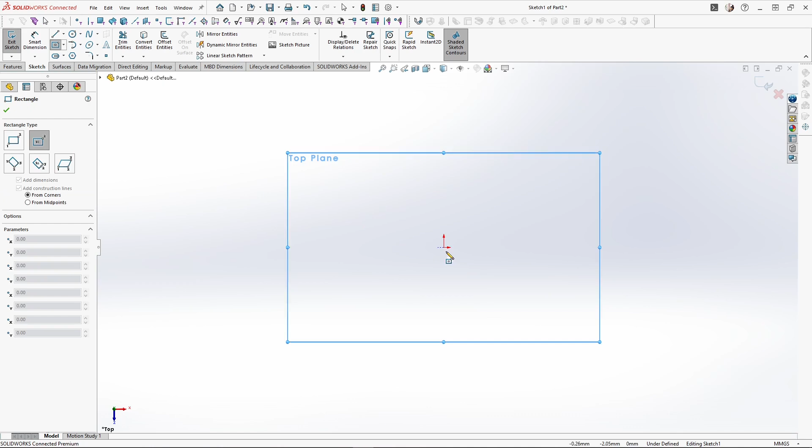Starting a new part with the cube in hand and a trusty set of calipers, I started a sketch onto the top plane, and with a centre rectangle sketched to 24mm square, extruding it into a cube by 24mm. Next, I'm going to model a keyring hoop. This helps with the orientation of the cube and where all my split sketches need to be.

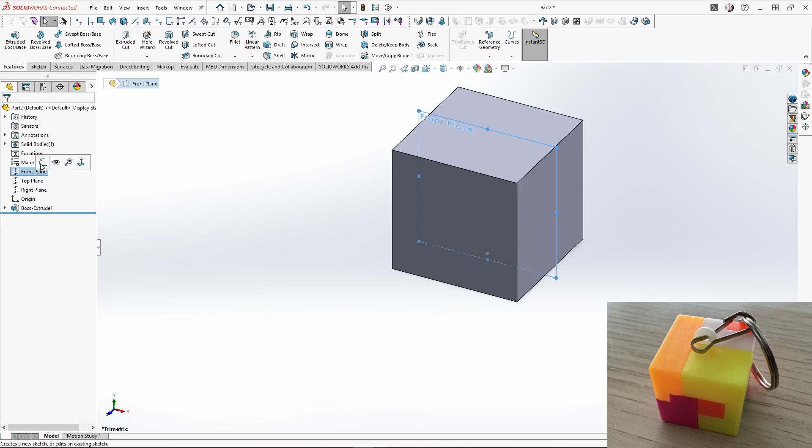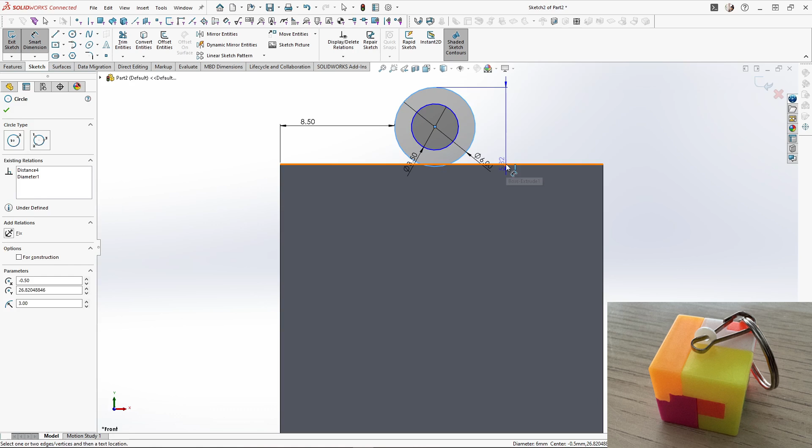Sketching onto the front plane, using the circle, I sketched an inner circle of 3.5mm and an outer circle of 6mm. The keyring hoop isn't actually centre to the cube as I initially thought, it's slightly off centre. Adding smart dimensions, I can hold shift and select the edge of the circle here and this edge of the cube and input 8.5mm. Then a final dimension, again holding shift from the top of the circle and the top edge of the cube, I can input 5mm. Then extruding the sketch 1.5mm in the opposite direction, merging the result.

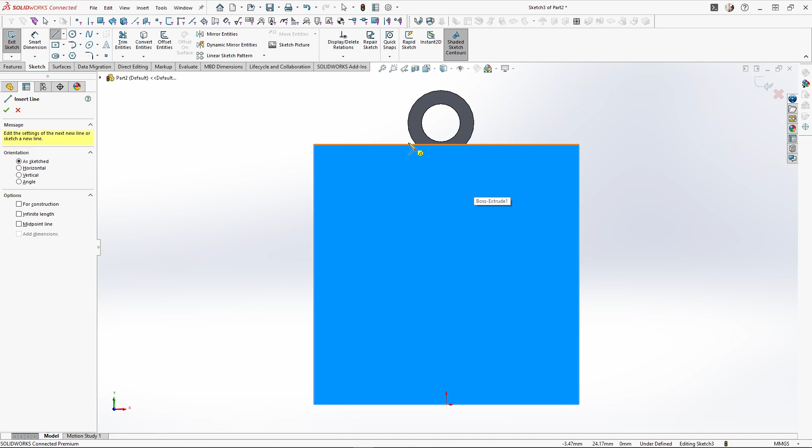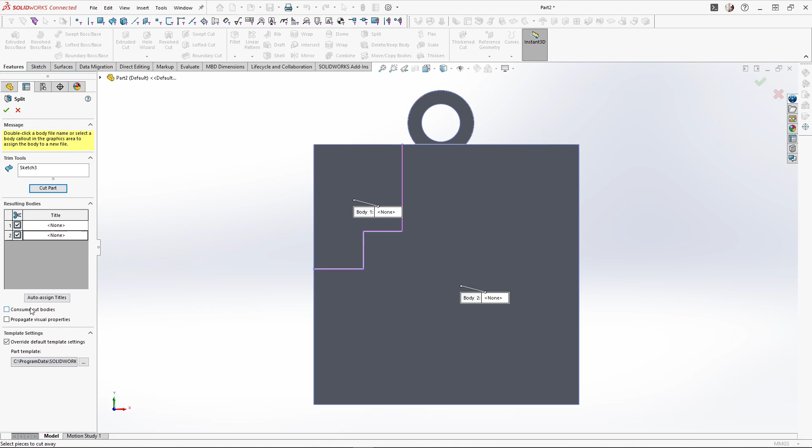For split sketch 1, I'm using the line to sketch onto the front face of the cube here. You have to ensure the sketch goes right up and attaches to the edges for the split to work. Once my sketch is fully defined, I can select features and split. Under Trim Tools, the sketch will be highlighted, and then I can select Cut Part. The features will split the part right through. To keep both resulting bodies, I need to select the scissors icon. Ensure Consume Cut Bodies is unchecked, so that all the resulting bodies remain, and apply it. I will be hiding each sketch after each split feature to keep the model tidy.

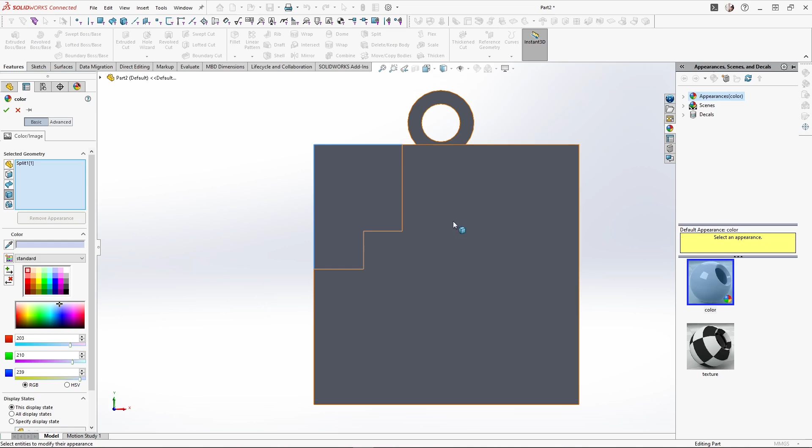Selecting the split body, I'm adding a colour appearance. I will be doing this for most of my split features. This is to help me keep track of the bodies as I go, as it only gets more complicated. For split sketch 2, sketching back onto this face, I'm starting the split sketch here, then sketching like this up to the bottom edge. Then I needed to add smart dimensions. I won't go through every dimension I apply, but if you're following the tutorial, you may want to pause certain stages and ensure you're adding the dimension to the correct sketches and edges.

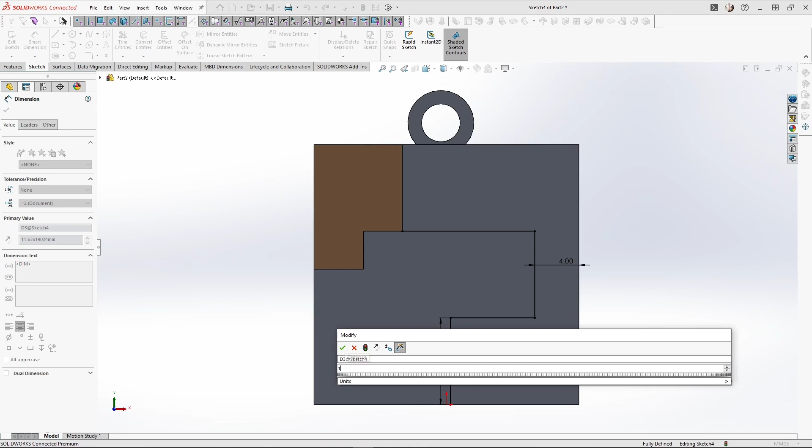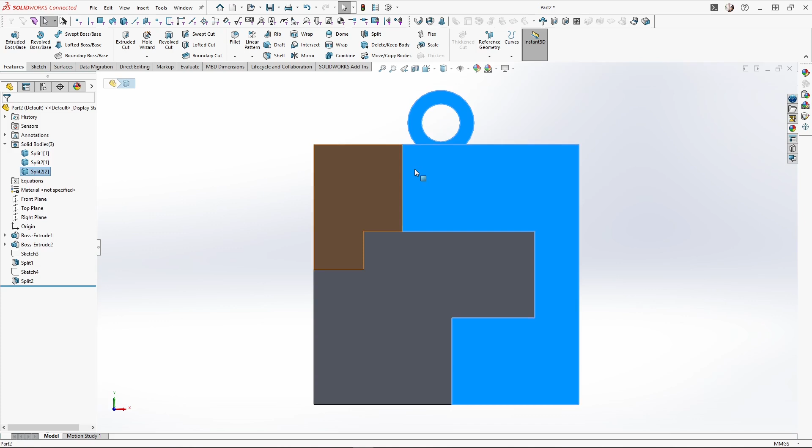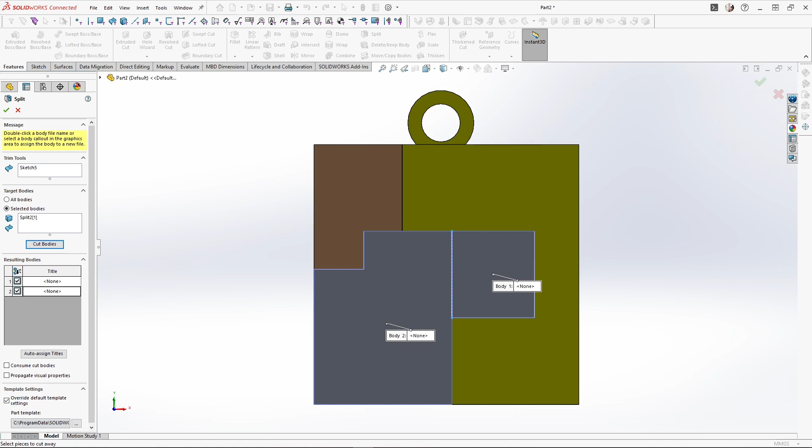Once fully defined, I can use the split feature. For the target bodies, I'm selecting this body and cut bodies. I can then check the scissors to keep all of the resulting bodies and apply it. I'm applying yellow to this body for now. For split sketch 3, I'm sketching onto this face and closing off this area here, and again splitting the body. Selecting this body for the target body, I can cut bodies. Again, keeping all the resulting bodies, I'm applying it. Now I'm changing the colours of the new split bodies. This helps me with the visual guides for recreating my cube.

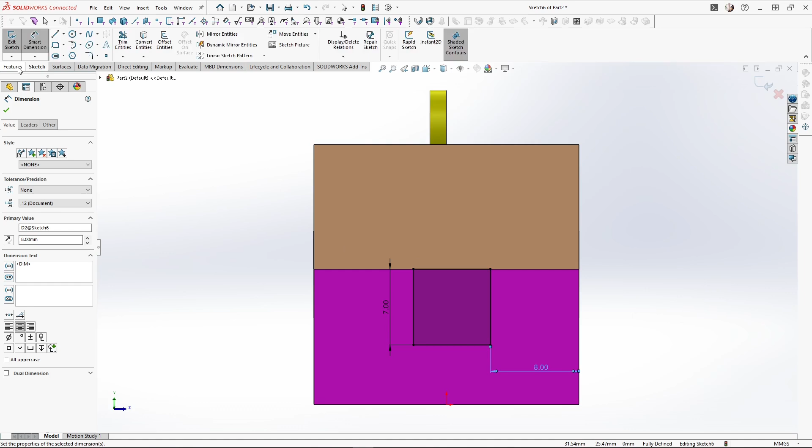Moving on to the left side, sketching onto this face, I'm taking the centre rectangle to sketch from the split edge here a 7mm square. Then I can fully define with an 8mm gap from this edge. Splitting the sketch, I'm selecting the pink body here for the target body. Checking all resulting bodies, I applied the split. Then I applied a green appearance to the new split body.

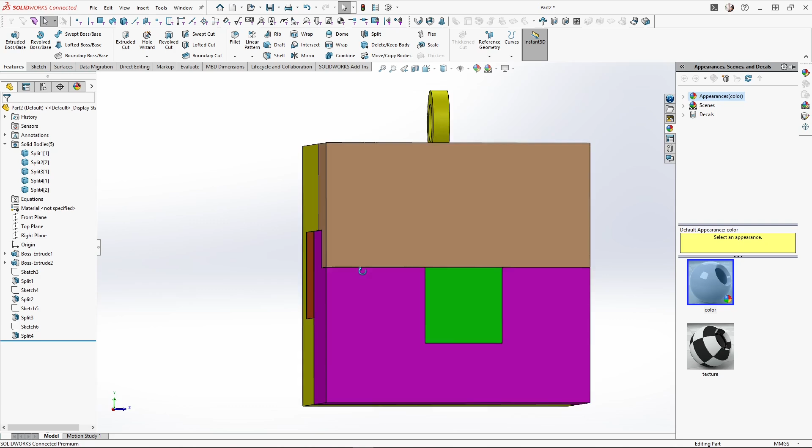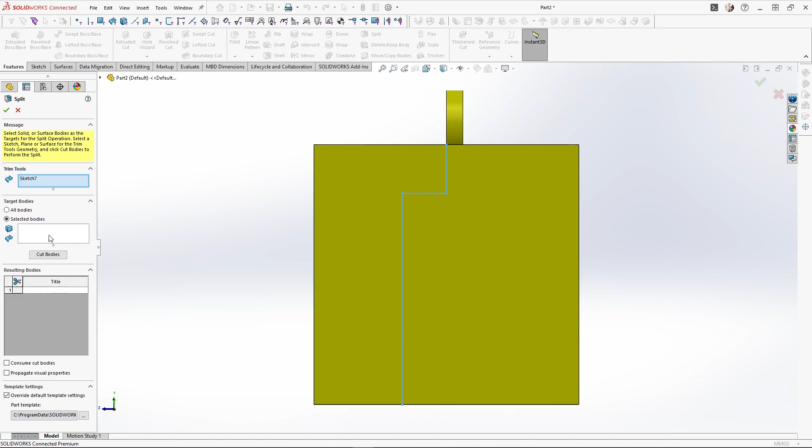On the right side of the cube, sketching onto the face with the line sketch, I'm sketching down from this point 4.5mm, across by 4mm and down to the edge of the cube. I can then split the yellow body and check cut bodies. Checking the resulting bodies, I can apply it. Then selecting the new split bodies, I applied a yellow and a dark orange appearance.

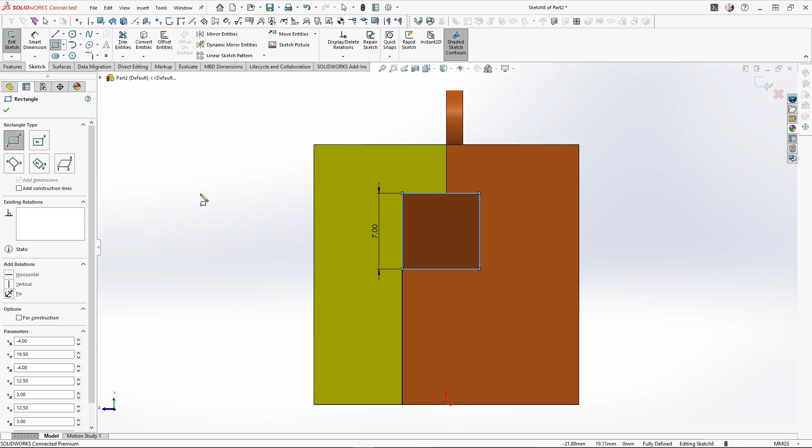Sketching back onto this side, with the corner rectangle, I'm sketching a 7mm square. I'm selecting this orange body for the target body and splitting the body. Keeping all resulting bodies, I applied the split. After the split feature is applied, I need to apply the appearances again. I hope you're managing to keep up.

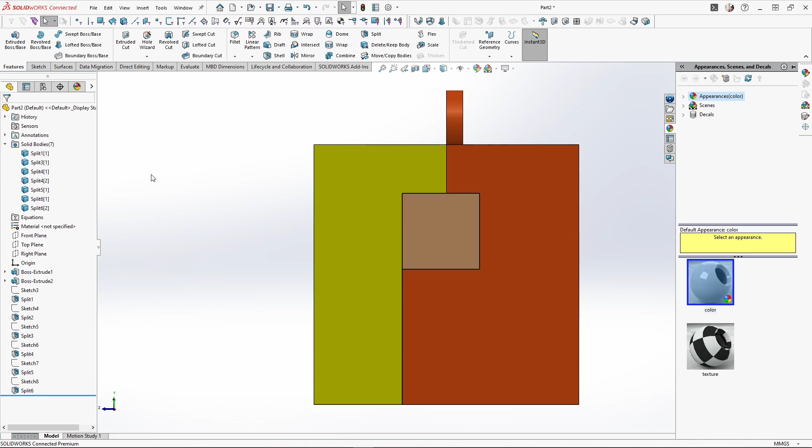Before I move on to the 7th split sketch, I'm going to view my cube to see the front face here and right click and hide the yellow body. Then I can use the combine feature with operation type on add. I'm combining the 2 light orange bodies here. Then I can reapply the appearances. It's important to do this to not lose track of the puzzle cube's parts.

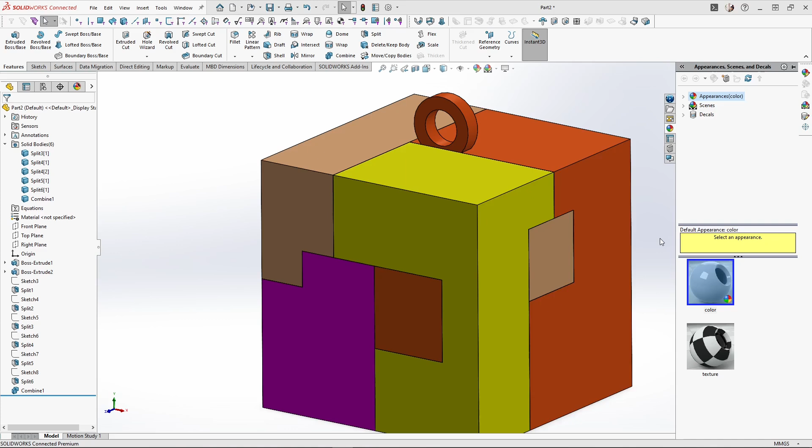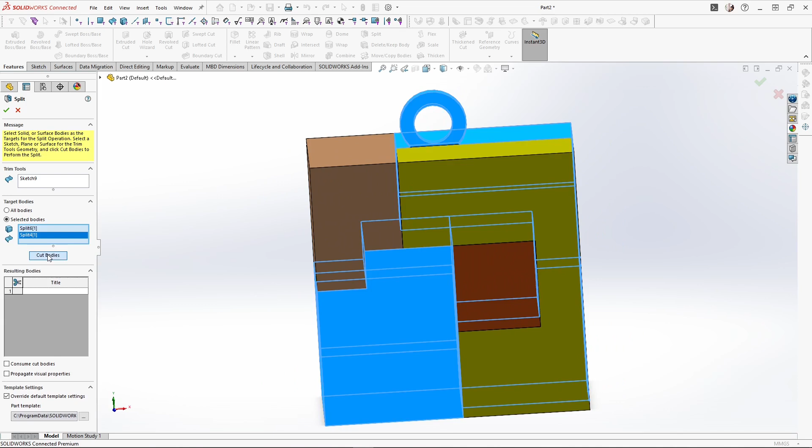Sketching onto this face for my 7th split sketch, I'm using the line to box off this area like this. It should be fully defined. With the split feature, my target bodies are the dark orange and the pink. Cutting the bodies, I again select all the resulting bodies to keep and apply it. Hiding this body here, I'm using the combine feature to add together the green body here and the split body here. Making the hidden body visible, I'm reapplying the green appearance and then the pink.

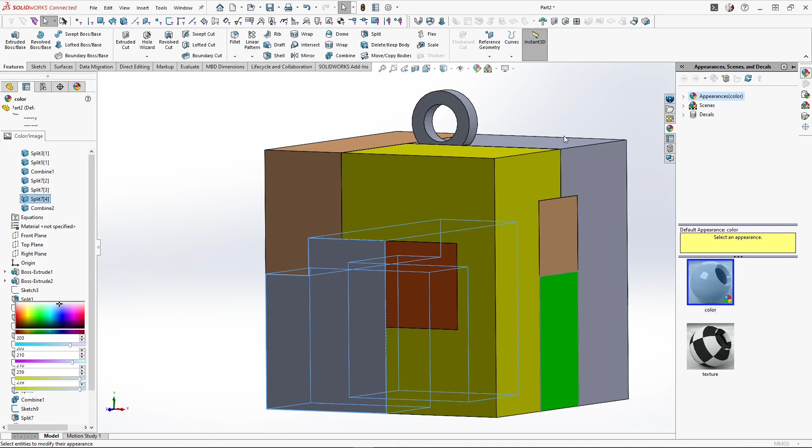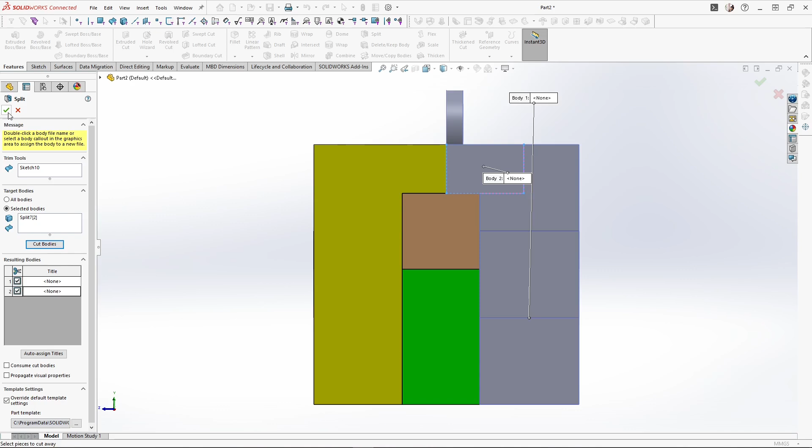For split sketch 8, I'm sketching onto the right side face and creating a small box here following the current edges, making it 7mm wide. For the split feature, I'm only selecting this body for the target body and ensuring I keep all cut bodies. Applying the split, I can then hide the yellow body and combine all of the bodies for the dark orange part like this.

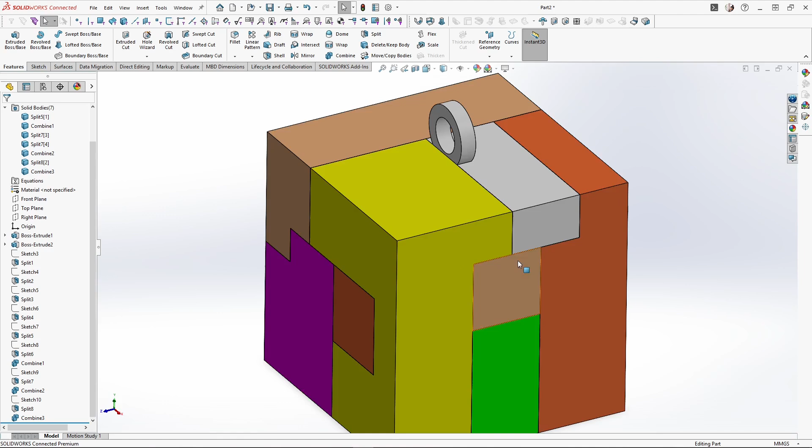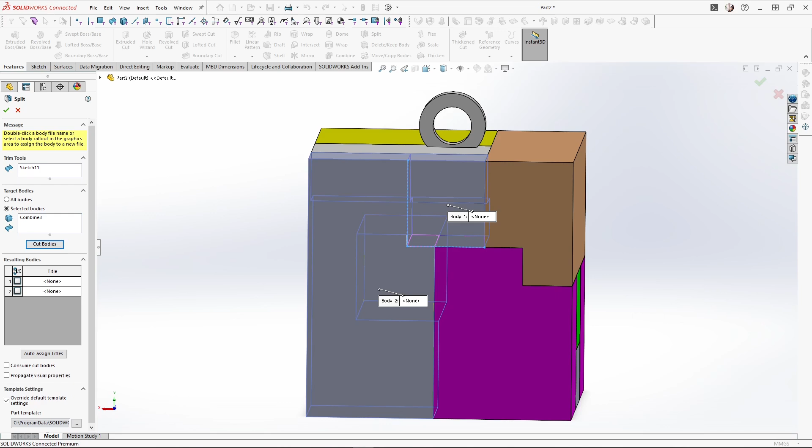Viewing from the back of the cube, I'm sketching onto this face for the 9th split sketch. Using the line, I'm boxing off this area like this. Again, using the split feature, my target body is the dark orange body here. Splitting the part, I checked both cut parts and applied the feature.

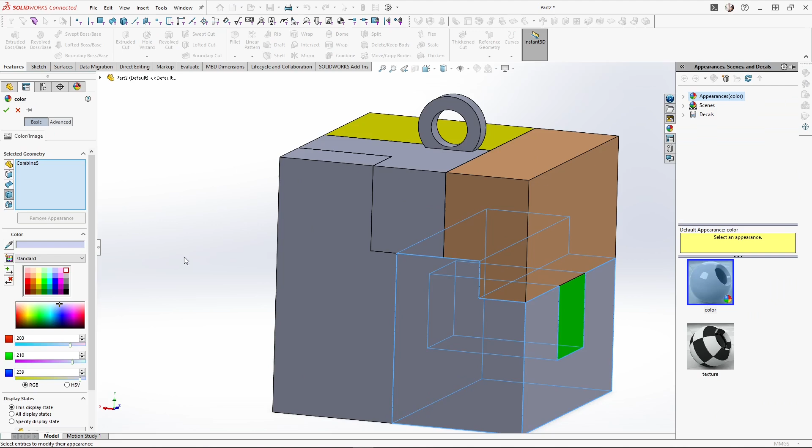From that split, I need to select the combine feature and add these 2 parts together to form the white puzzle part. I also needed to combine the 2 pink parts here. Then I can reapply all the appearances to any that are missing.

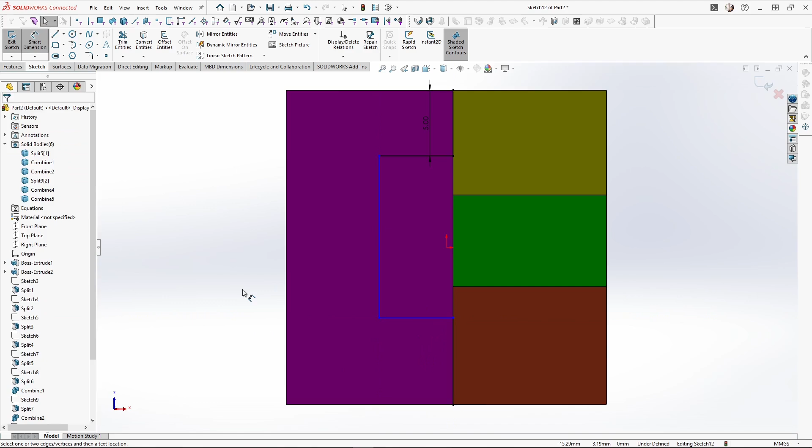From the bottom of the cube, I'm sketching onto this face for the 10th split sketch. I'm going along the split edges and boxing off this area and closing the sketch at the cube's edge. Once fully defined, I can use the split feature. And for the target body, I'm selecting the pink body and cut. Here I can select all the resulting bodies and apply it.

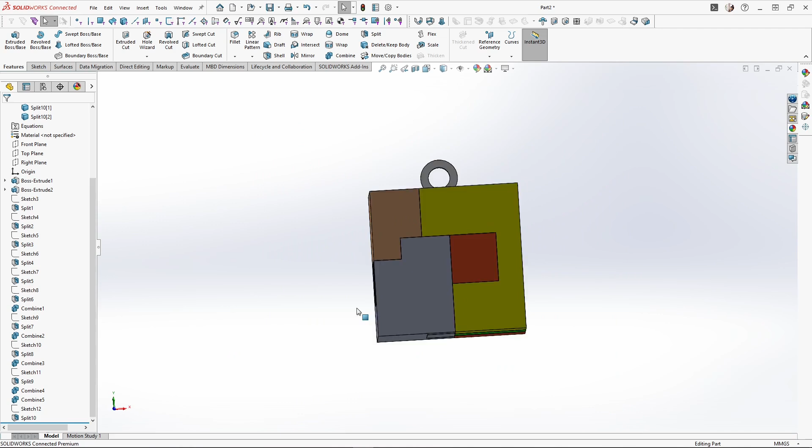Now for the 11th split sketch, I'm sketching back onto the bottom of the cube and sketching a 7mm square from this corner. For this split feature, I'm selecting the dark orange, green and the new split body here for my target bodies. I'm then checking all 6 resulting bodies to keep and applying it.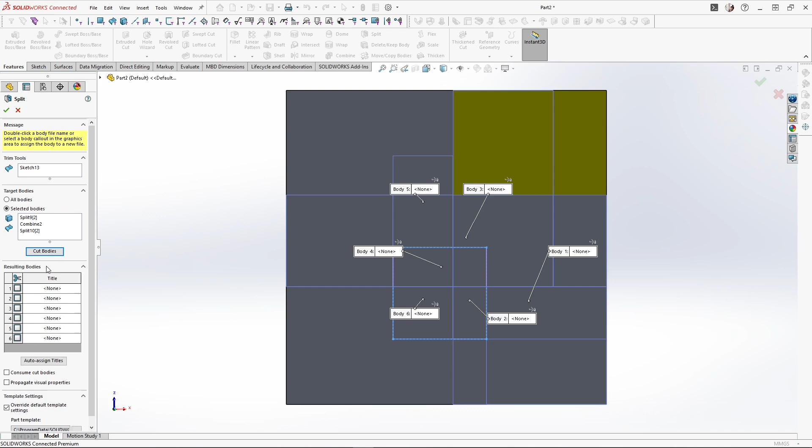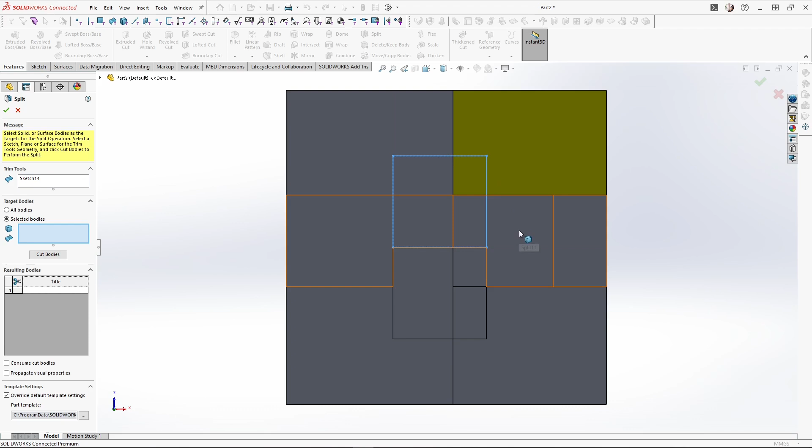Repeating the process for my 12th split sketch, here I'm sketching the same square above from this point. With the split feature, I'm selecting this split body and this body here, keeping all bodies and applying the feature.

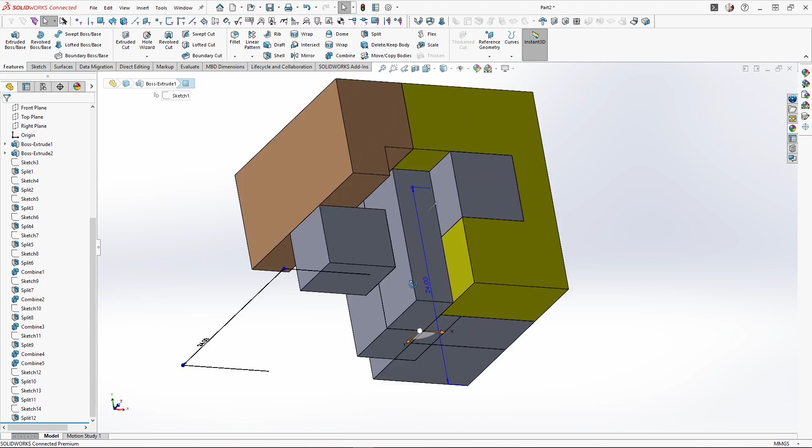Now to start combining some of these loose parts together. I'm going to hide this body here and combine these 2 bodies with the yellow body. Once combined, I can reapply the appearance.

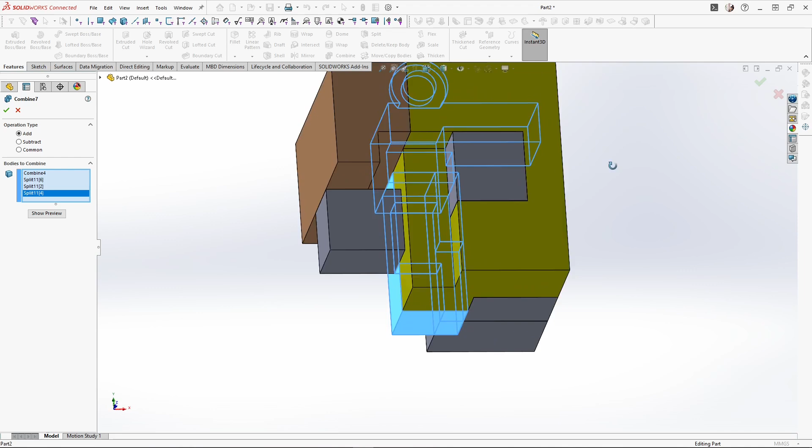For my next combine feature, I'm combining the top right part and these two split bodies. I hid the yellow part to ensure I had no hidden parts here. Then applied the feature. Here I can apply the white appearance to the puzzle part, bringing all the parts back into view.

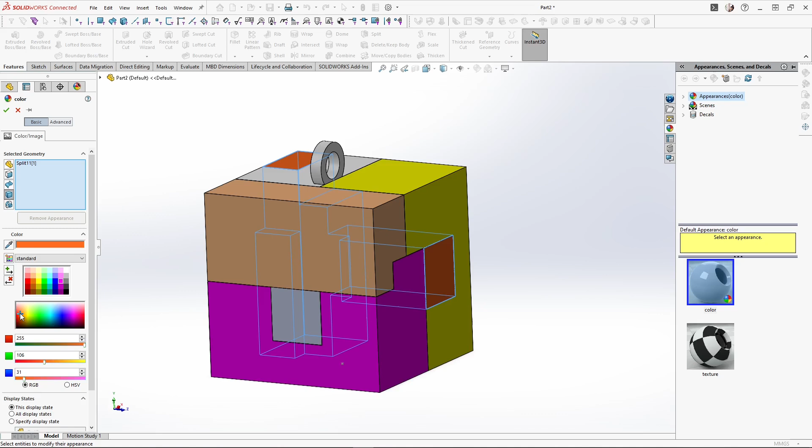I reapplied the pink appearance to this body, the dark orange to this, and the green here. Currently, the green body is in two parts, which is wrong.

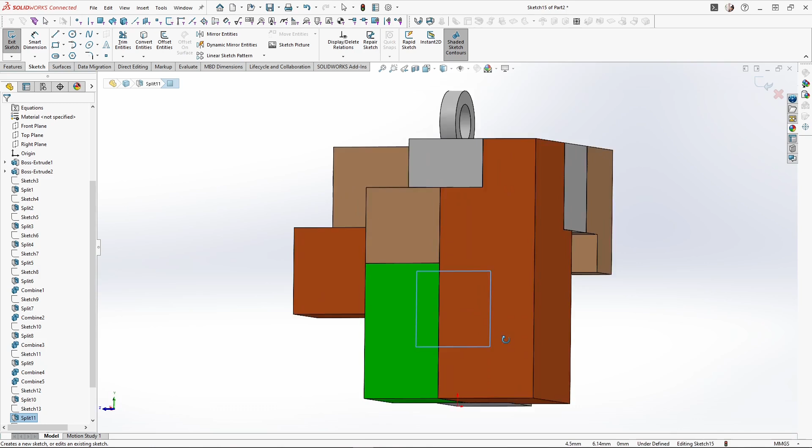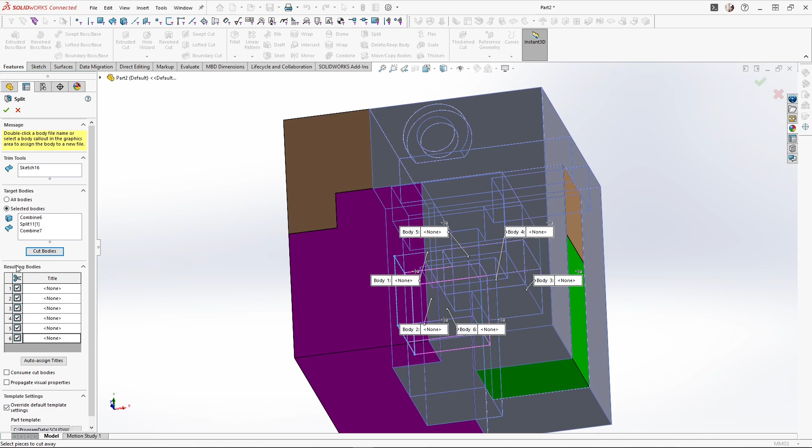To fix this, I'm hiding the yellow and pink parts and sketching onto this inner face here. I'm converting the face entities, bringing the parts back into view. I'm using this sketch as my 13th split sketch. With the dark orange, yellow and white bodies for my target bodies, I split the part, and I kept all of the resulting bodies and applied it.

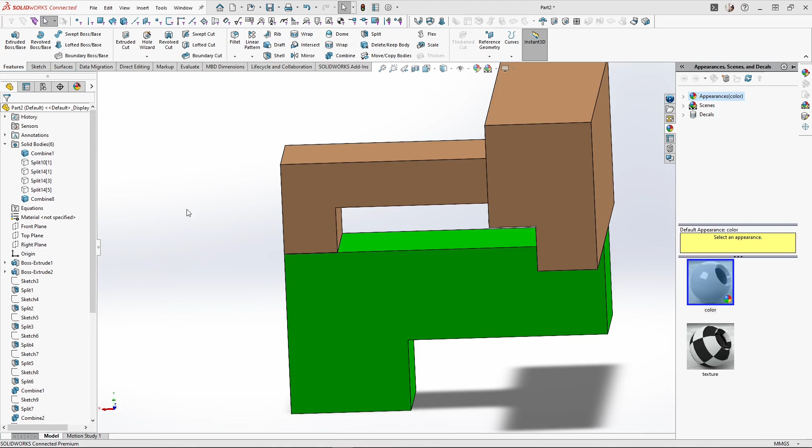At this point, I need to hide most of the cube's bodies to see my new split bodies. Using Combine again, I'm combining these 5 bodies to create the green puzzle piece. At this point, I'm re-updating appearances that have been lost through features. Sometimes within features, you're able to check the Propagate Visual Properties box to keep appearances applied after applying a feature. But this doesn't work when parts are being split into multiple bodies.

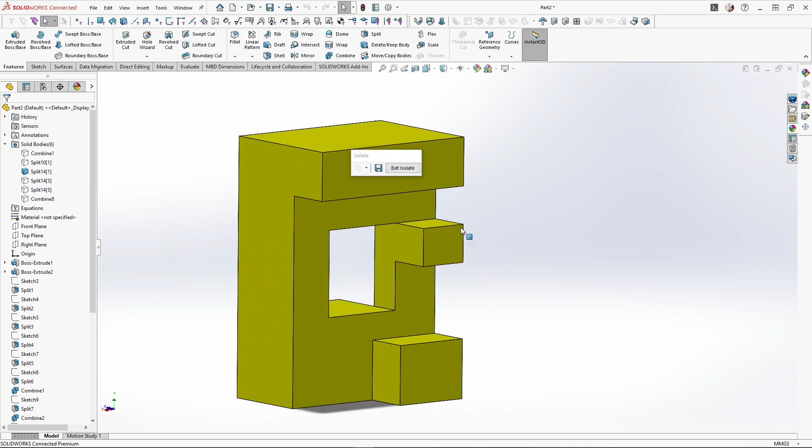Selecting and isolating the view of the yellow puzzle part, I need to select this face and the Direct Editing tab here. Using the Move Face feature, I'm using the Translate option and changing the drop down to Up to Surface, and selecting this face for the end face of the feature, then applied it.

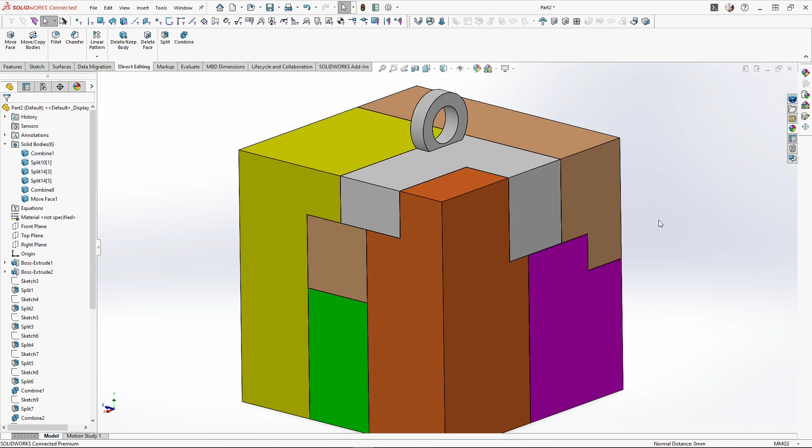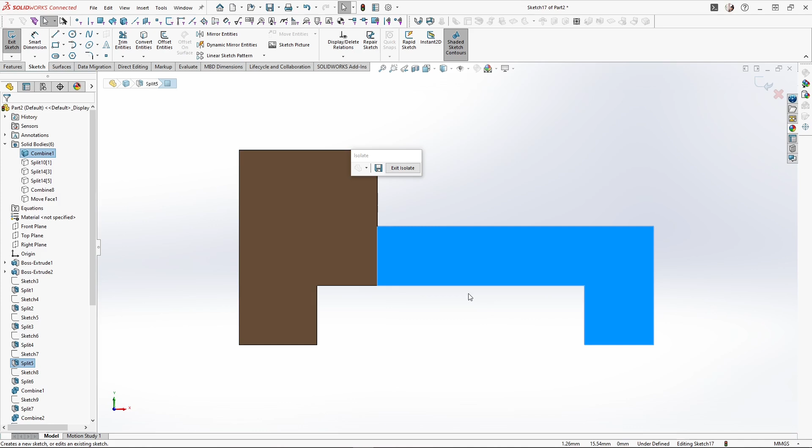Next, I'm isolating the light orange puzzle part. For this part, I need to create an indent. I could achieve this by copying intersecting bodies and combine subtracting them away, but this could be more complex. As I have the puzzle parts in front of me, I can measure the cutout using my calipers and sketch onto this face and create this rectangle profile. I'm then cut extruding this sketch 4mm into the body.

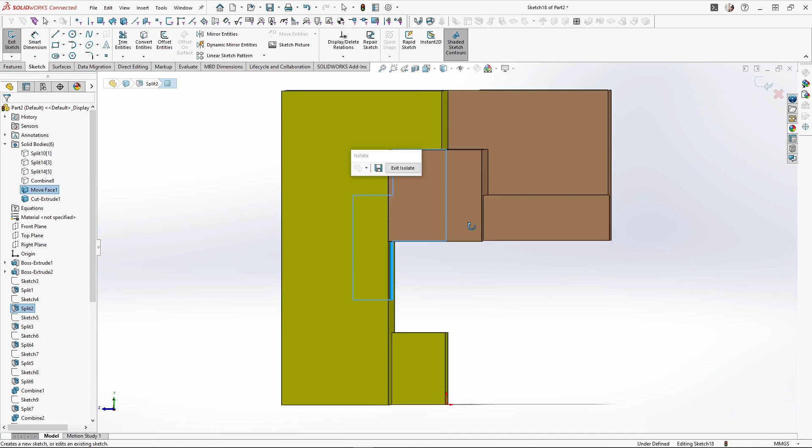Then isolating the light orange and yellow puzzle parts, I need to close off and fill in this gap here. To do this, I'm sketching onto the face and converting this face of the light orange puzzle body. I'm extruding the sketch up to this face and merging the result only with the yellow puzzle body.

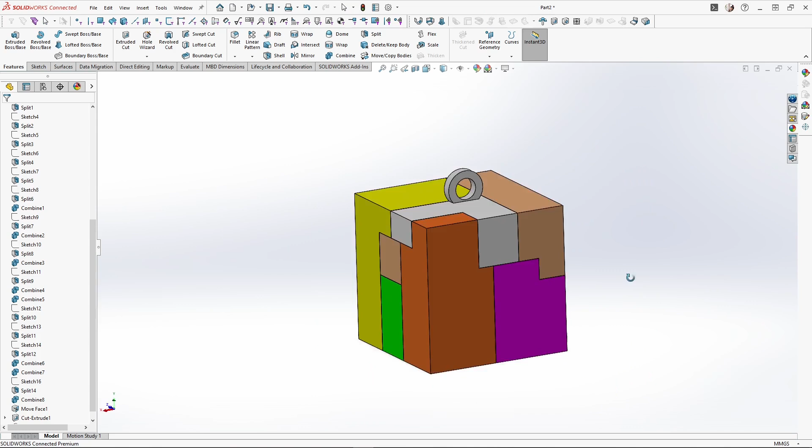At this stage, the puzzle cube is complete. I'm right-clicking onto each puzzle body and renaming the bodies for each colour. Saving my cube, I could use Save Bodies and save all of the solid bodies as new parts and create a new assembly of these parts.

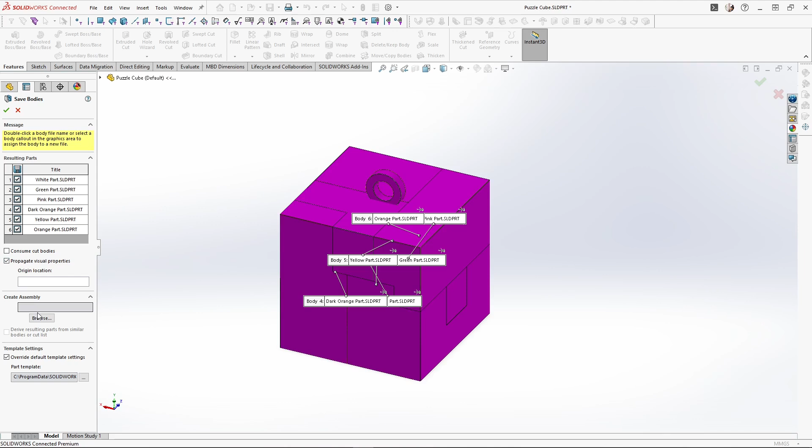Opening my new assembly of the cube, I could create an exploded view and turn it into a motion study animation, which could be opened within Solidworks Visualize and then rendered into this animation.

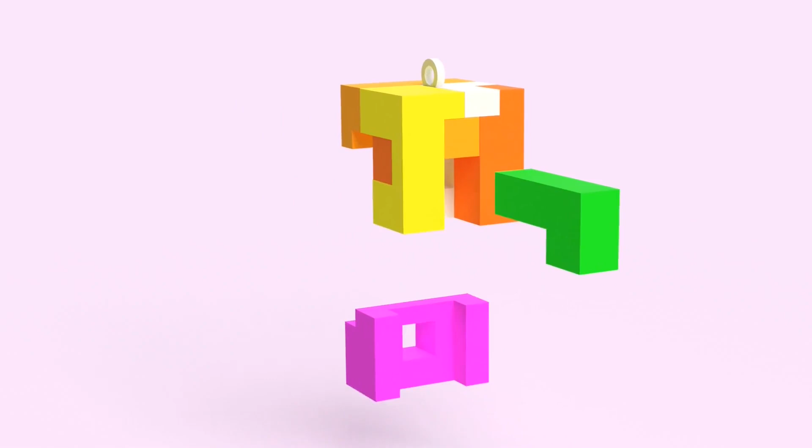Reverse engineering a physical object into a 3D model can be the best way to test yourself. Feel free to 3D print this model and see how it works in real life.